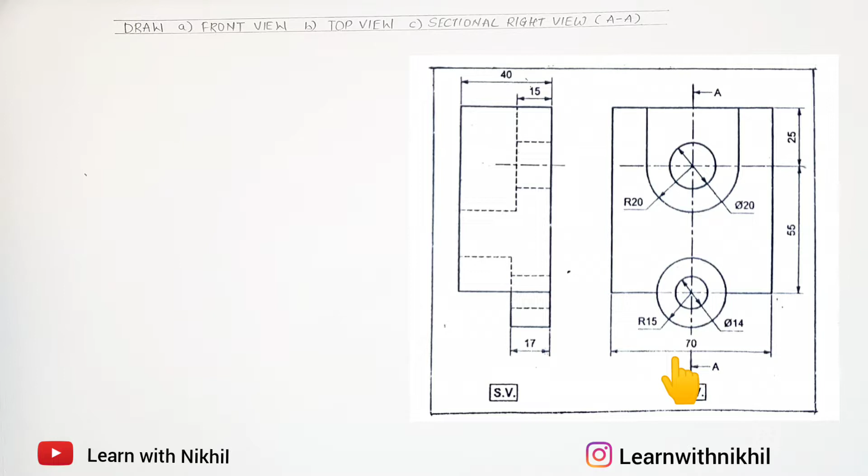So here we have taken another sum on sectional orthographic projection where we have been given the front view and the side view. We have to draw its sectional right view, front view and the top view. So now the total width required to draw the front view is 70 millimeter and the height is 25 millimeter plus 55 plus radius of the outer circle, that is 15 millimeter. So the total height required to draw the front view is 95 millimeter.

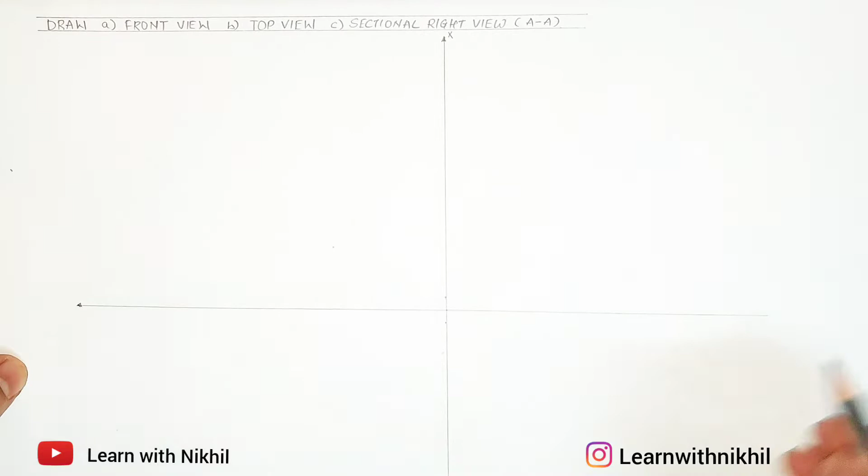So as we know the dimensions, we can draw the axis. So this height I'll just calculate. So I'll mark a point. So the space required to draw the front view. So this much space is required to draw the total figure, total height of the figure, including the front view and the top view. Now with these dimensions, I'll draw the axis, xy axis, x dash y dash axis, and above that 5 millimeter, I'll draw the baselines where we'll draw a figure.

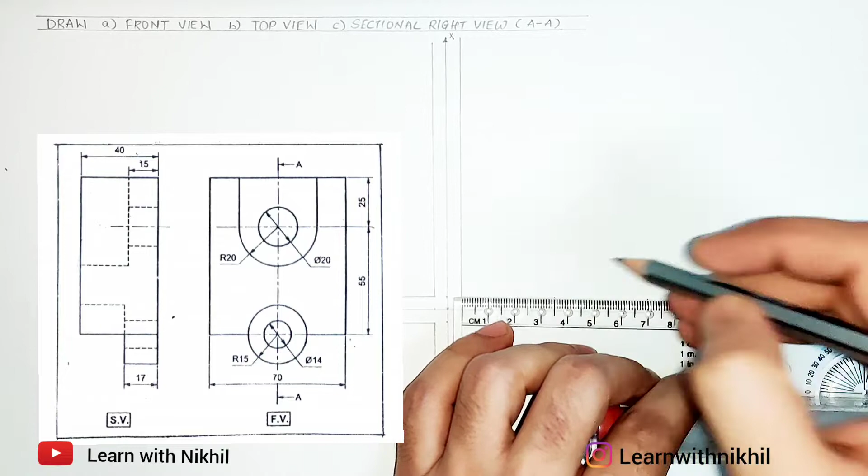Now starting with the front view, the total width is 70 millimeter. I'll mark a point. I'll mark the center point at 35 millimeter. Through these points, I'll draw parallel lines. You can extend these lines downward towards the top view also. Later on, as you will require to take the projections downward. So at the start only, you can take the projections to the top view.

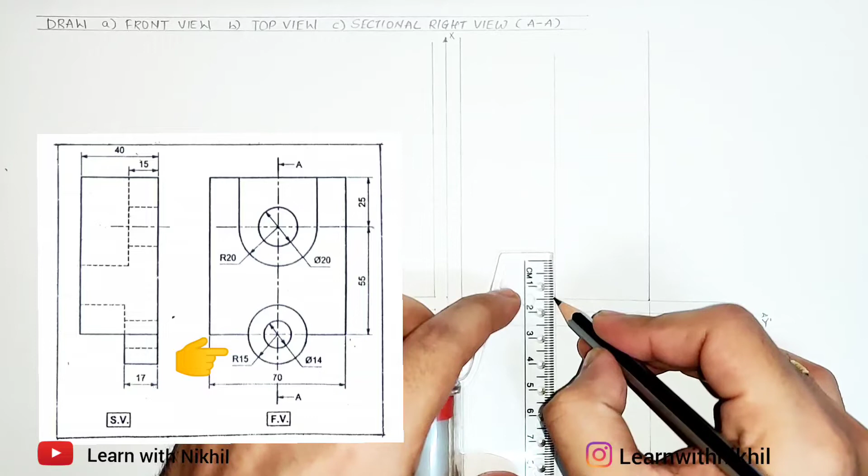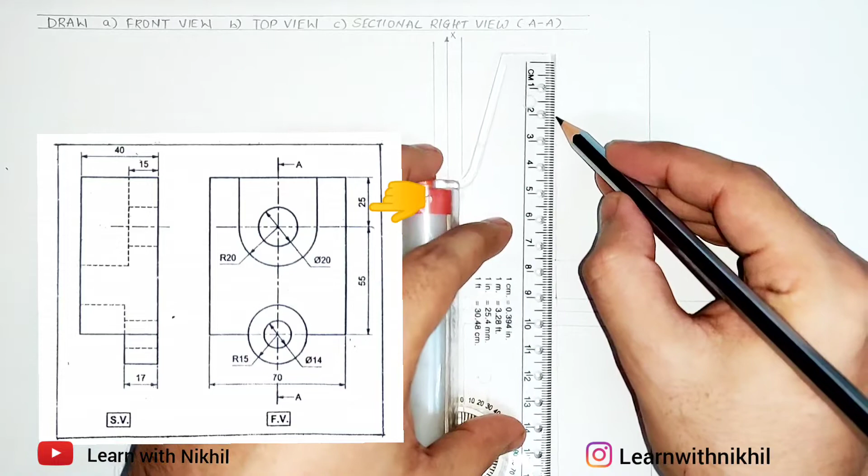Now we'll draw the outer circle. Radius given is 15. So 15 above, I'll mark a point. And through that point, I'll draw a parallel line extending towards the side view. Next, I'll mark a point above 55 millimeter and above that 25 millimeter. So this is the total height for the front view. Now taking reference of this line, I'll draw a parallel line from both these points.

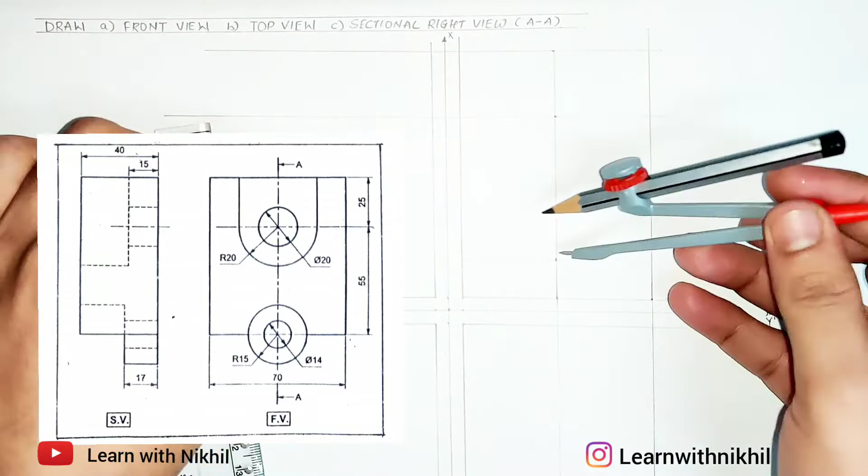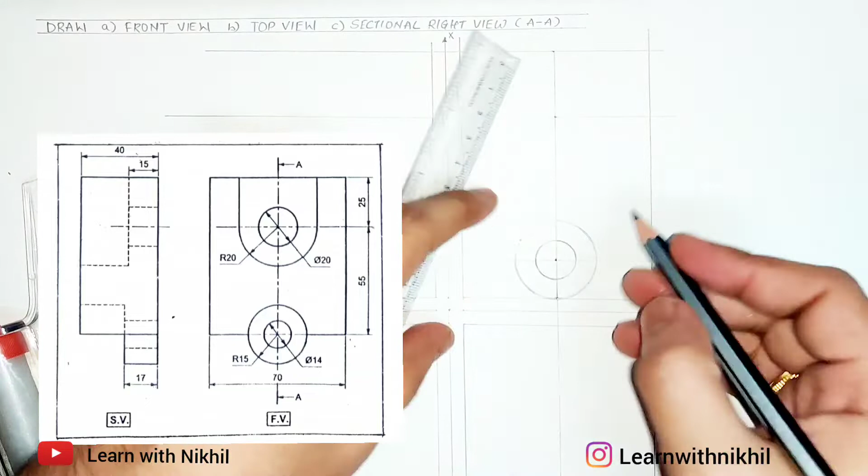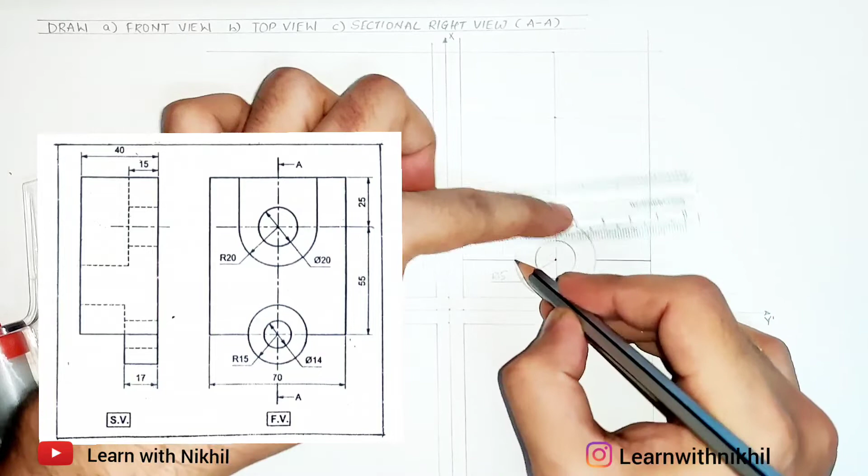Now from this point, I'll draw a circle. The outer circle radius given is 15. We have already marked a point above 15, so you can directly take that radius and draw the circle. Now the smaller circle diameter given is 14. So radius is 7 millimeter. We'll draw the circle from the same point. I'll make dark line as given in the question. We have to draw the normal front view and we have to draw the sectional side view. Extend these lines upward till the top, make it dark.

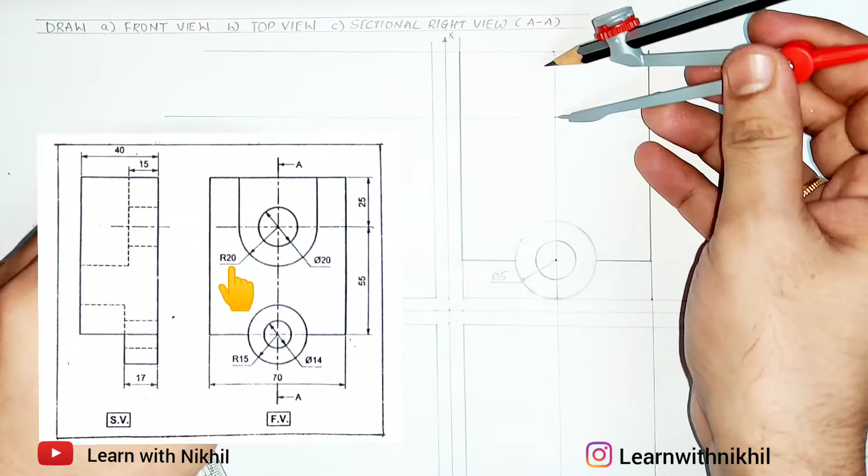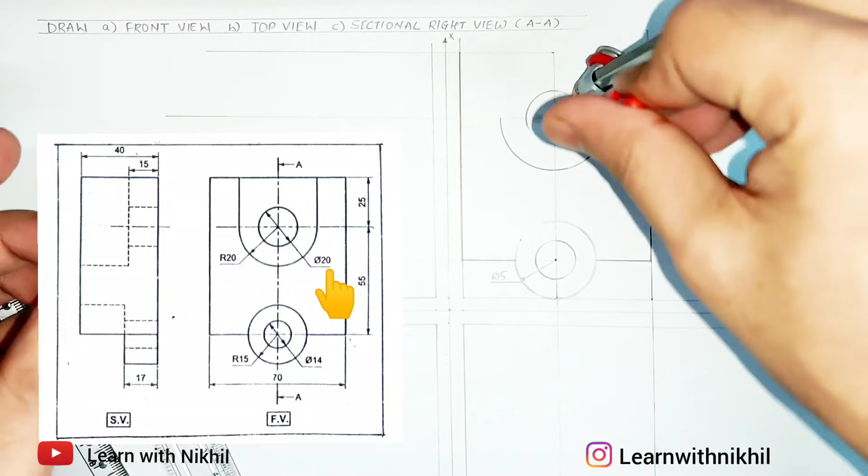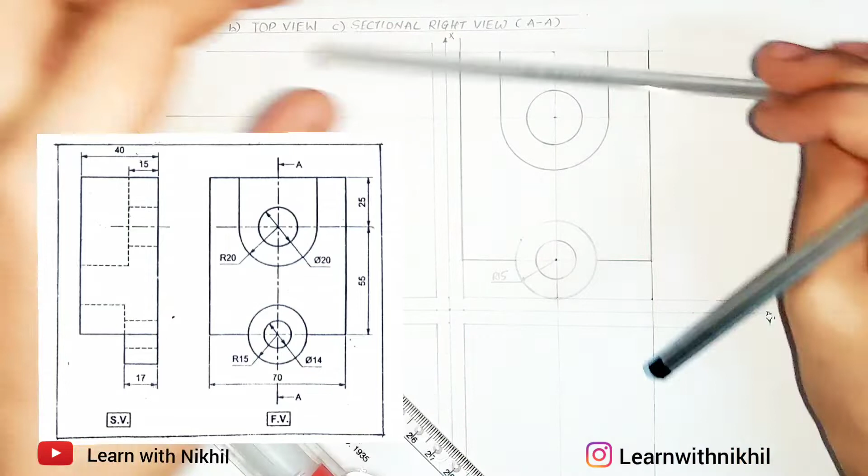Now we have to draw a semicircle of radius 20 and smaller circle of diameter 20. So on compass, taking radius as 20, keeping the pointer on this point, draw the semicircle. Next, we'll draw the circle of diameter 20. So taking radius as 10 millimeter, from the same point, we'll draw another circle. Now taking this as a reference, I'll draw this line parallel straight touching the upper part. Make this line dark. With this we are done with the front view.

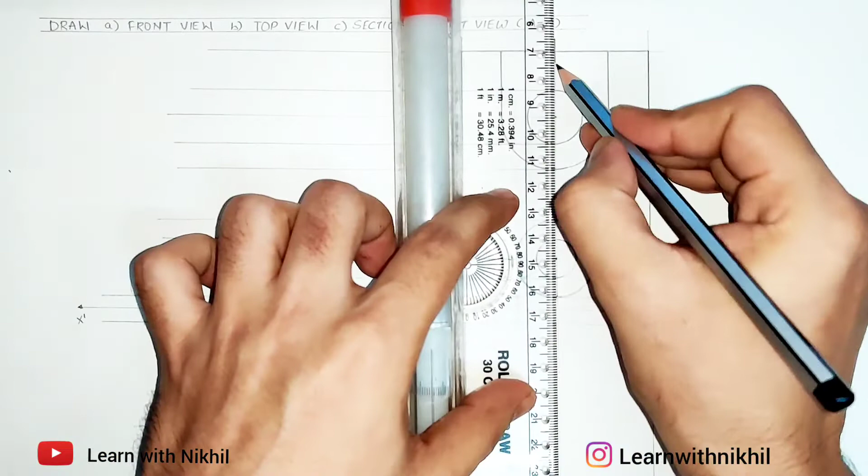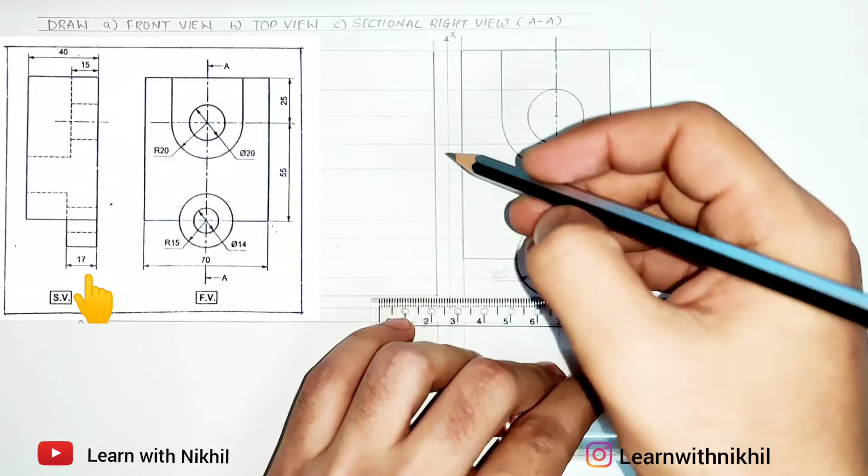Now we'll take the projections towards the side view. So take all the projections towards the side view. Circle ends, circle center line. Drawing the circle center line. After taking the projections towards the side view, we'll start with the side view. We have to draw the sectional side view. So this line will be dark. After the section, this line will be visible. This width given is 17 millimeter. So I'll mark a point 17 millimeter. This distance is 40 millimeter. Mark a point. I'll draw this dark.

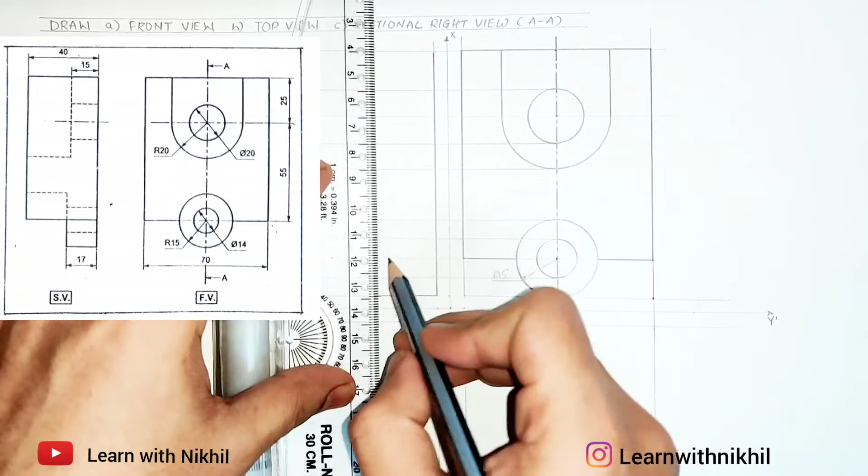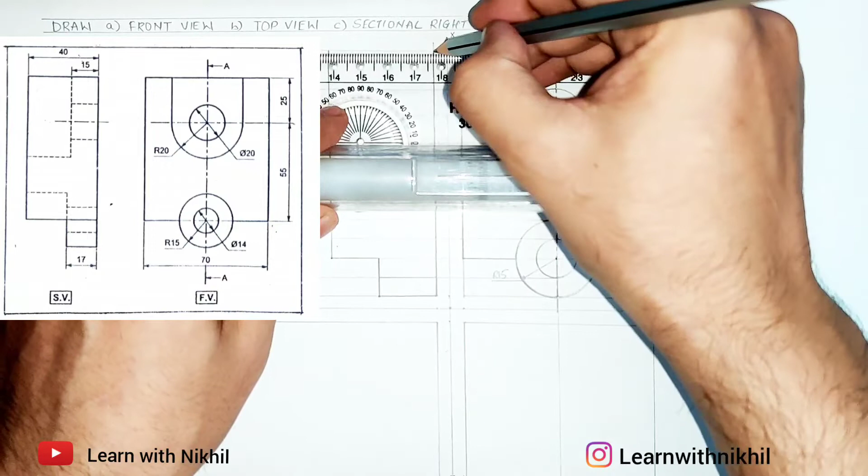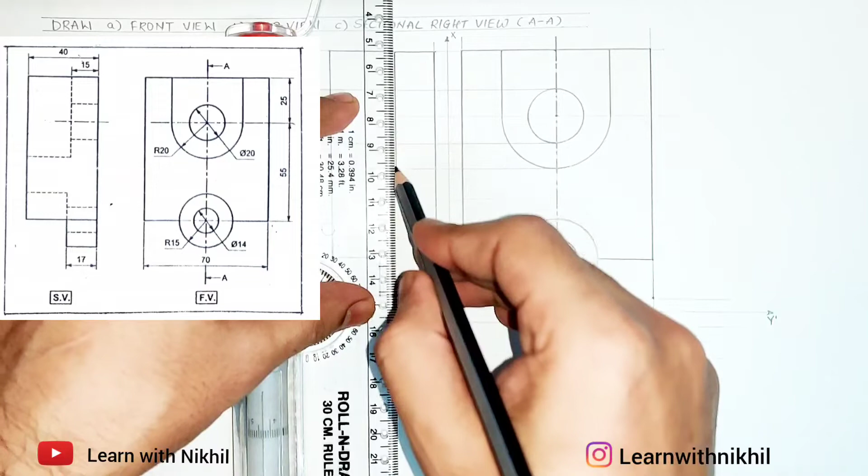Extend this line upward towards this center of the circle. Now this inner circle which is hidden will be dark after the sectioned part, so I have drawn a dark line. All the dotted part which is right now shown in the question will be dark after the sectioned part. Join this dark. Now this distance is 15 millimeter. Mark a point 15 millimeter. Through that we'll draw dark line as I told earlier. After the section this part will be visible, so I'll draw it dark. This part will also be visible, so dark line.

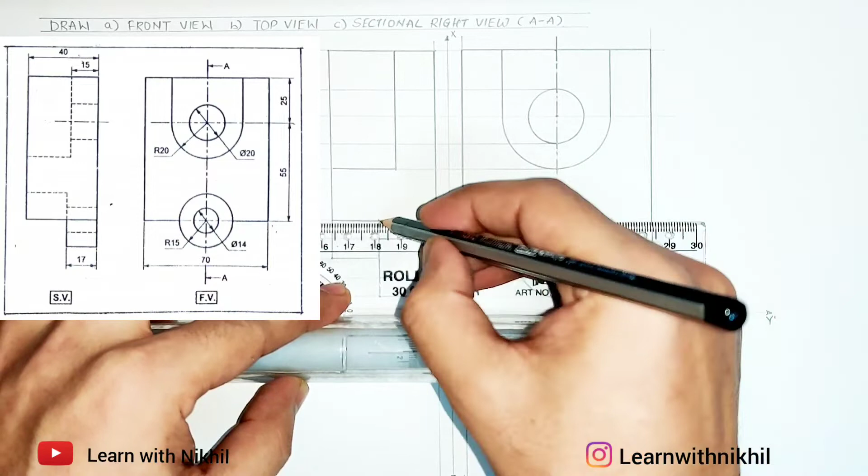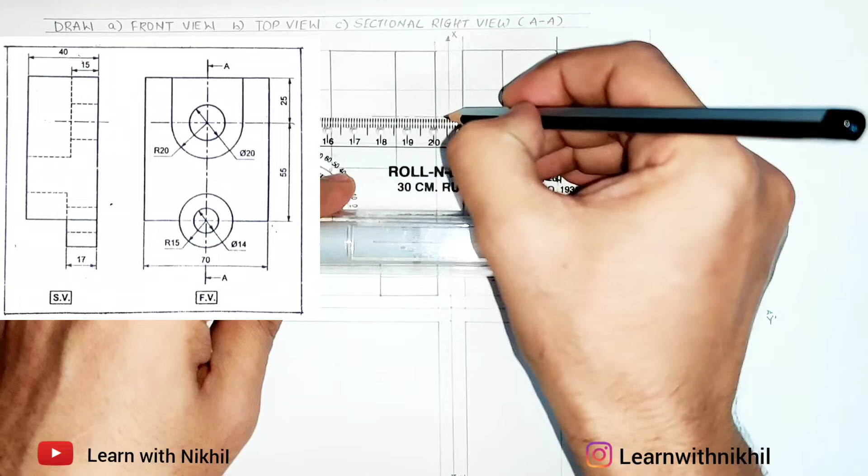All the dotted lines which are shown right now in the side view will be dark after the section part, as it is cut from the AA direction. This is the circle center line. Draw it in the circle and also in its projection. Here also you have to draw the circle center line. This circle will also be visible. The edges will be visible after the section part, so I have drawn it dark.

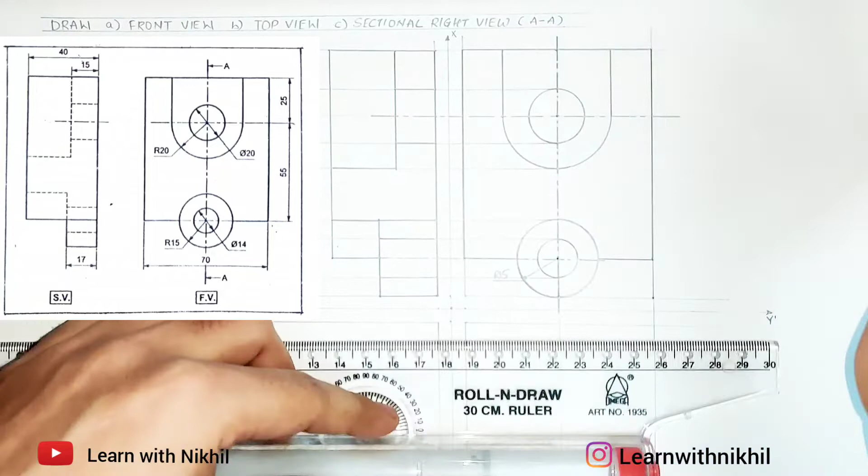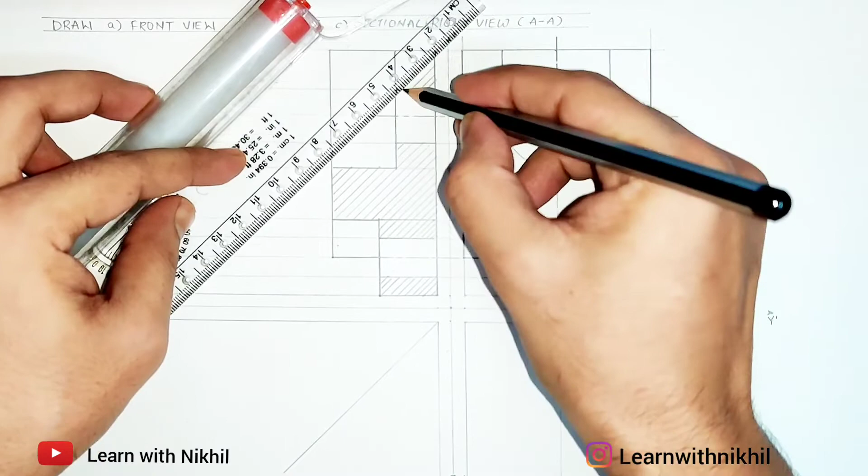Now the section lines, we have to make it at an angle of 45 degree. So this line is 45 degree. I'll draw the section lines. So after the section, this part only will be sectioned. The circle will be visible. This part will be sectioned, and this upper part. Rest of all is not sectioned. Now to draw the top view, take all the projections from the front view to the top view, from the side view to the 45 degree angle line, and from the 45 degree angle line towards the top view.

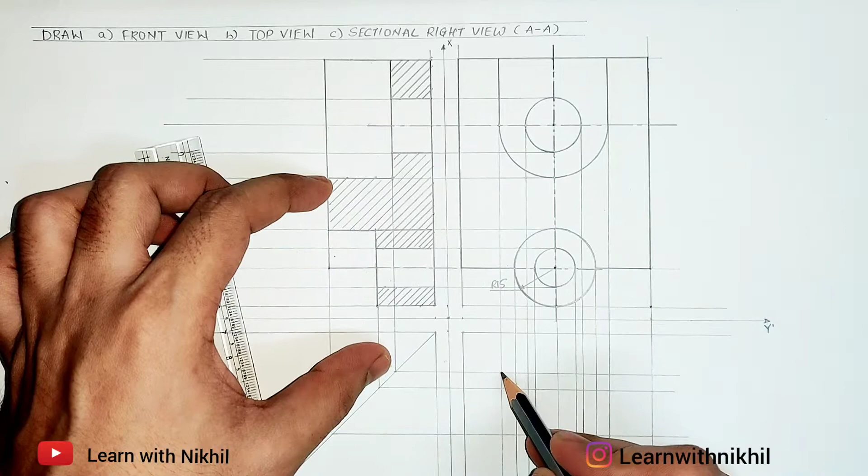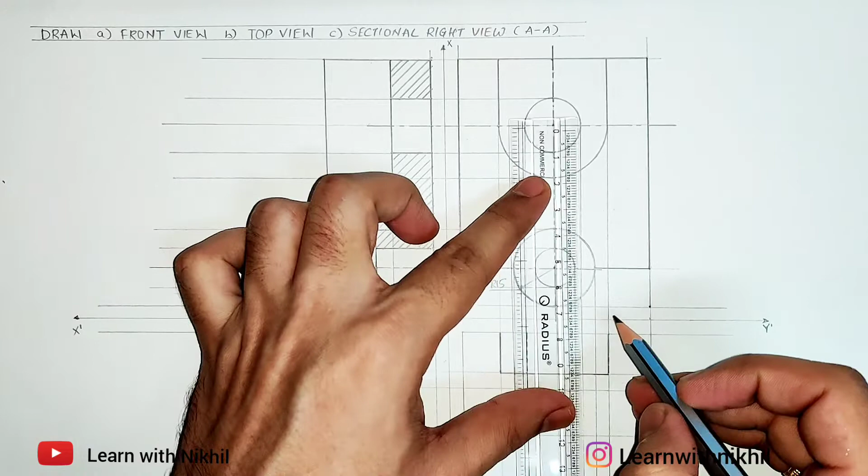Now from here the top view will be, so first visible, this semicircle will be visible from the top. It will look like a rectangle shape. So this is how the first semicircle from the top view will be visible. This circle will be hidden here, so I'll draw it dotted. Now the outer edge will be there, so it is dark.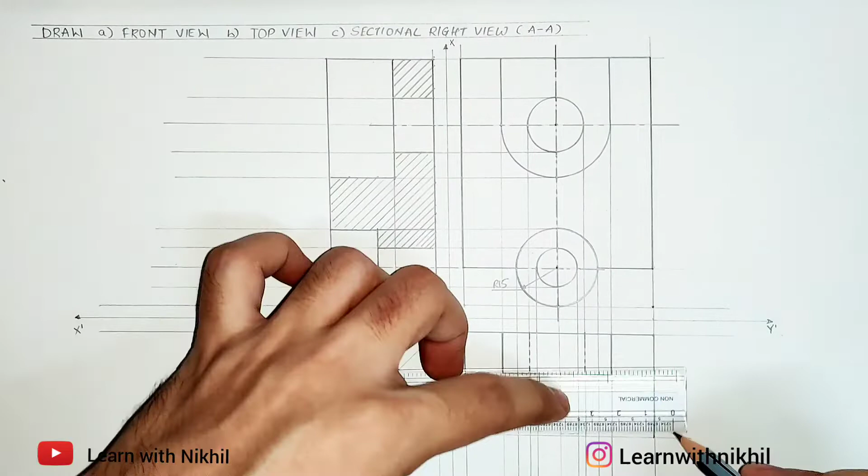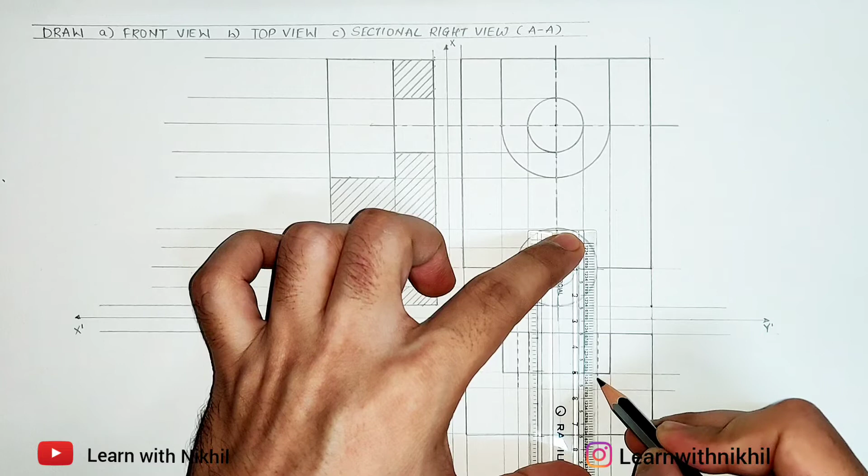Now this bottom circle, it is a bit extended outward, but it will be hidden from the top view. So I am drawing it dotted. So this is a bit extension, as you know, the width of this down circle is 17 and the upper one is 15, so it will be outside. Drawing the circle center line.

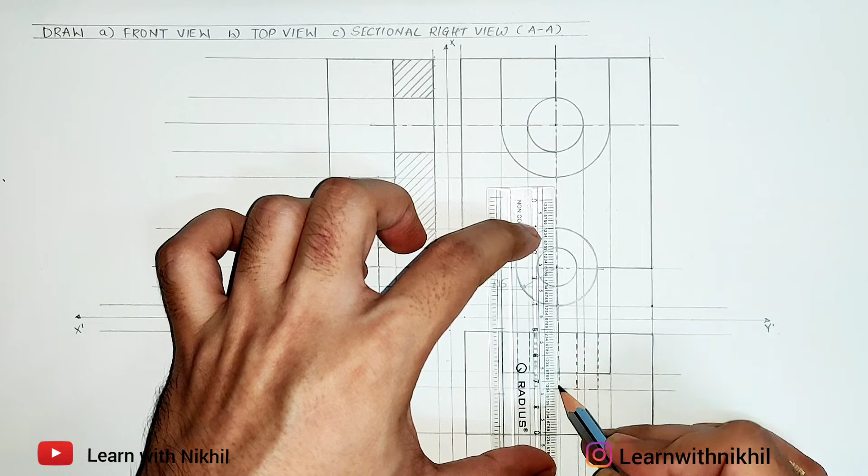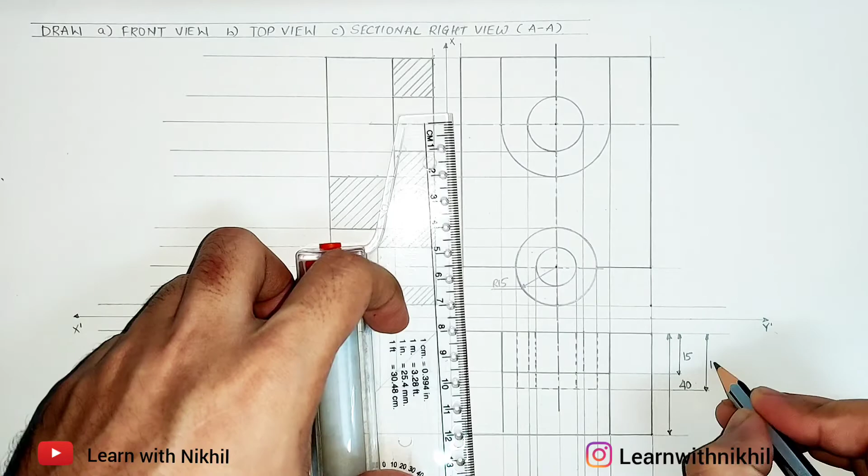Now this part will be dark. This is the sectioned part. You can see from the side view, and we are done. Just marking of the dimensions. All the dimensions which are given in the question should be marked.